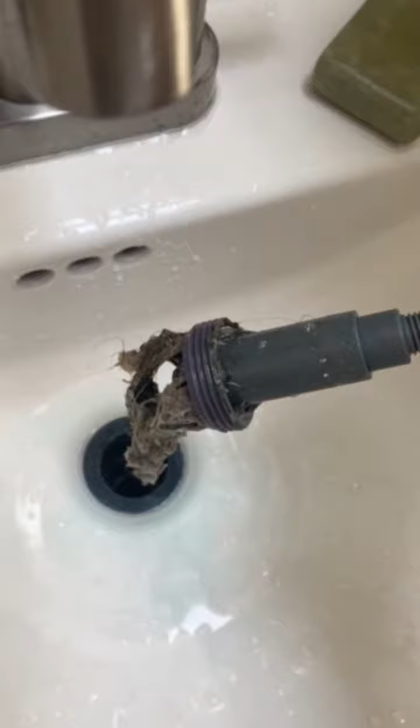As far as I'm concerned, these things are junk, and I'm just going to replace this with a simple filter that sits on top, 3D printed.

I'm just measuring the hole with the calipers. It's about 35mm.

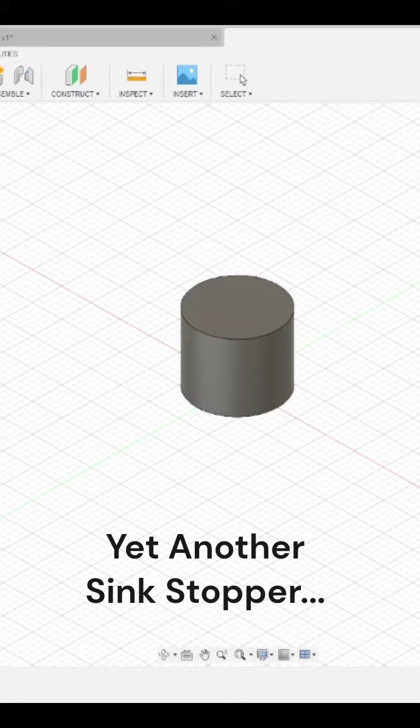In Fusion 360, we're going to make a cylinder, and then make an imprint in that cylinder. The next step is we're going to start to make some tabs. These are spring tabs.

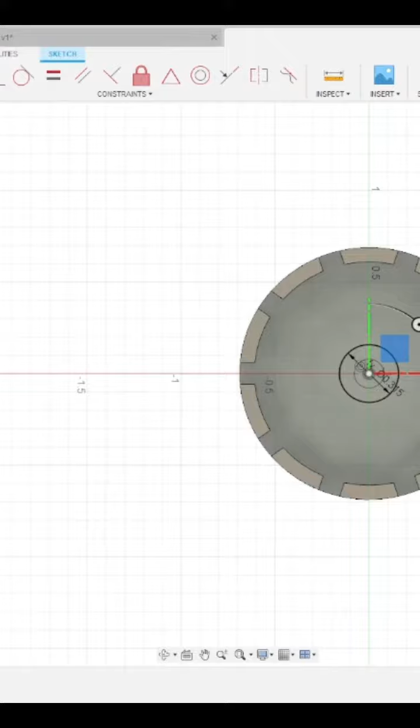The way the spring tabs work is when you put it in the sink hole, it's going to hold it in place so you can't push it down farther than it needs to be. To do that, you cut out an imprint, then use the rotate tool to rotate it around. In the middle, we make a little stem, so we have something to hold onto to get the tabs out.

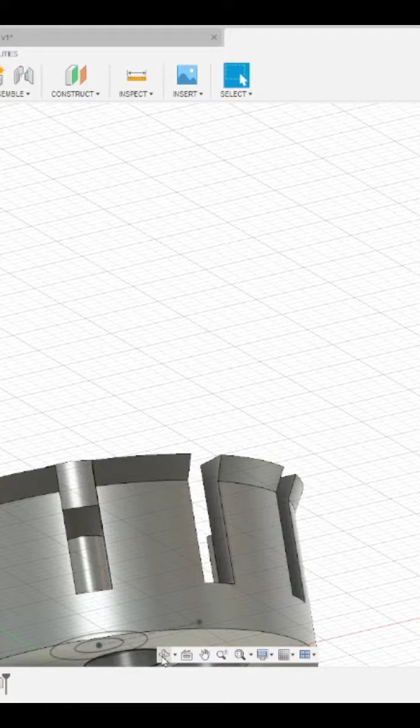Now we're making holes for the water to drain in. Again, use that rotate tool to make 6 holes. Then we make a little lip on the spring tabs so that you can't push it in too far down the pipe. We finish it off with some chamfers, then that's it.

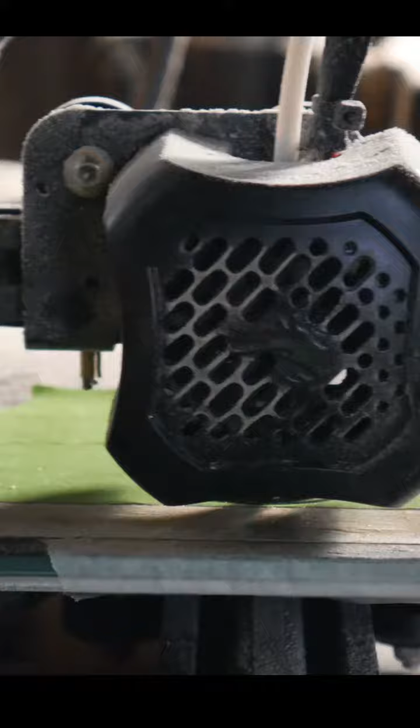And here it is, doing the 3D print. This is the time lapse of my first one, and we actually ran out of battery here, but it still looks pretty cool. Oops, camera died. Well, here it is.

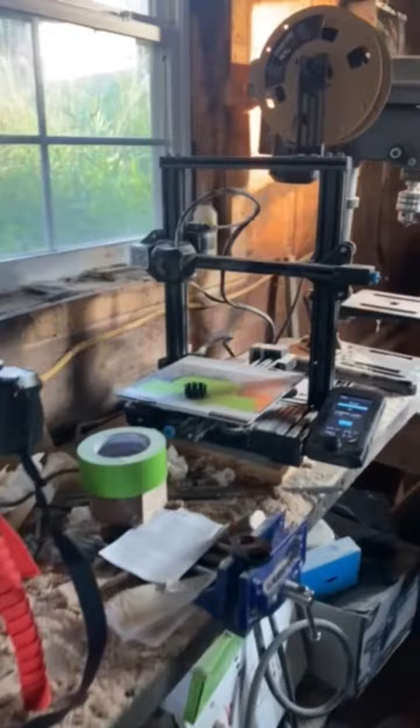All right, let's see if this fits in the sink. Nice.